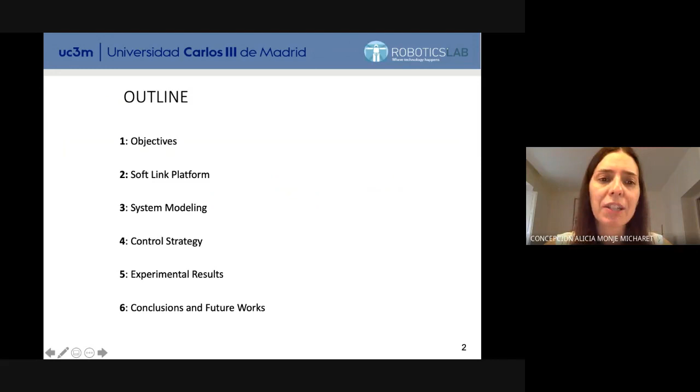I am going to present the work with title Fractional Order Control of Soft Robotic Links. The outline of the presentation is as follows: objectives, the platform itself, the link itself, the modeling of the system, the control strategy, experimental results and conclusions, and future works.

So the objectives of this work are the following ones. First of all, we want to design a soft link to be used as a part of any type of robots, maybe a mobile robot, a floating-based robot, a humanoid robot, any type of robot in which you can integrate this soft link for different purposes. We have used this link as a soft neck for the humanoid robot, but also as a soft arm. So there are different functionalities.

And of course, the design should be prepared to support all types of functionalities. We can even connect different links to each other and have a multi-modular soft robot itself, which is one of the purposes of our future work. So the idea is to design the system, to model the system, and then to control the system using a particular type of controllers, which are called fractional order controllers, because they can guarantee robustness of the system in the terms we will see later.

The system we are proposing, the soft link, is very, very simplified when it comes to modeling. We totally agree with that. There is a strong simplification of the model, but it is later the controller that is responsible for facing the mismatches, the non-linearities that we have neglected, and so on. So a robust strategy from the control point of view will be developed, and we will demonstrate that even if the model is not that accurate and complete, we can manage to control the whole system very robustly.

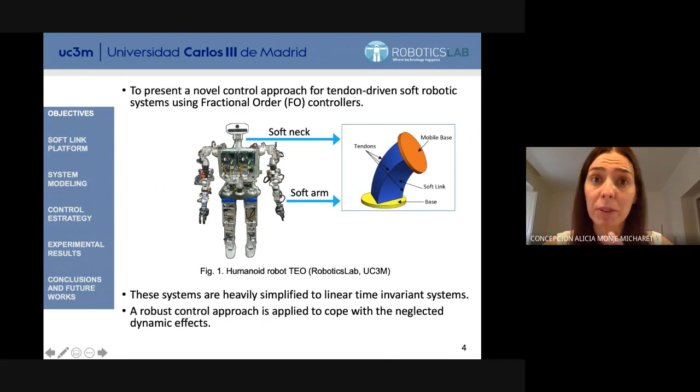So if we concentrate on the platform, it has evolved over time, but this is the base of it. We have, as you can see, a fixed base, and then a mobile platform. These sticks here are to allocate different masses, because we want the system to be robust to different masses on the tip of the system. So this is tendon actuated. We have 3 motors here, each connected to a winch, and then the winch connected to a tendon or a cable.

So by acting on the motors' angular position, we vary the length of the different tendons, and according to that variation, we move the platform. This is quite simple to understand. And of course, this is a 3 degrees of freedom soft continuum link that you can see here, the blue one. It is modeled as an elastic beam undergoing large deformations, and we can interchange the link, replacing it by different types of links, like, for instance, steel spring, or a NinjaFlex neck, which is the final link we are using.

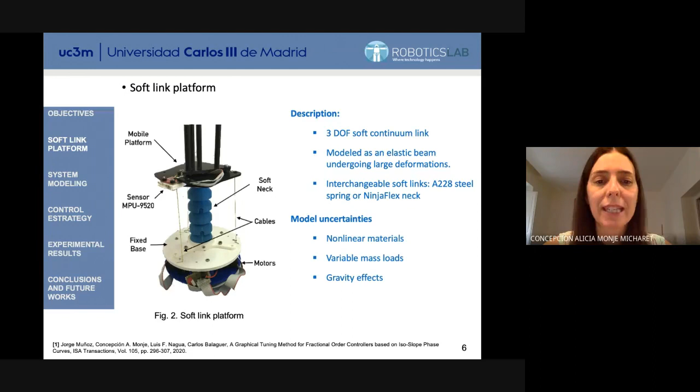The model uncertainties are mainly characterized by the nonlinear material, the variable mass that we can have on the tip, and also the gravity effects, as we will see later. So if we present the main mechanism configuration in figure number 3, we can see that by changing the length of the tendons, I can achieve 2 different angles. The complete pose is composed of 2 main angles, which are the inclination angle and the orientation angle.

So as you can see here, this theta s angle is the orientation that can vary from 0 to 360. So I can orient the soft link in the whole range. And also I have this inclination angle theta p.

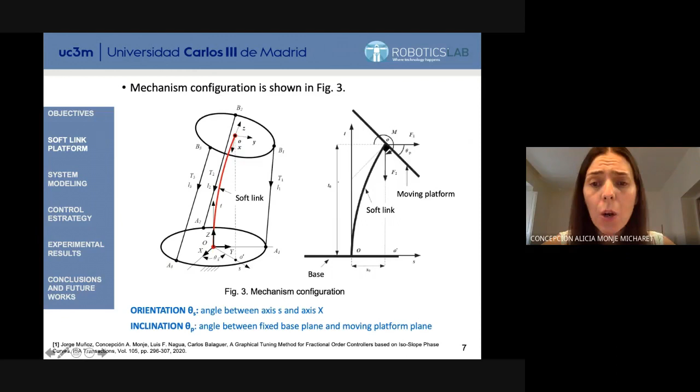Let's continue with the model itself, because what we have to do here is to obtain the inverse kinematics. So why the inverse kinematics? Because if for a particular pose, theta s and theta p, I obtain the length of the cables, then I can later relate that length of the cables with the particular angular position of each motor acting on the tendons. And then I can control each motor to achieve its particular angular position. Then I would be controlling the whole system to achieve that particular pose.

So the inverse kinematics problem is as follows. For a particular set of angles theta p and theta s, which is the pose, I determine the different lengths. And then I relate each length with a particular angular position of the motor.

So finally, the control problem, in a very summarized way, is reduced to just simply controlling the motor position that we have at each motor level, and then controlling that, I will achieve the particular pose. And so the transfer function of each motor in a first approach is, as usual, a second order transfer function if we relate the velocity input and the velocity output, right?

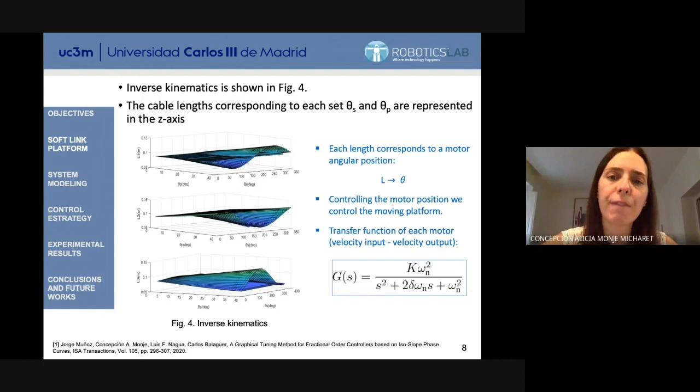So finally, controlling this transfer function, which is modeling each motor, so that I can achieve particular angular positions, which is the same as saying particular lengths of my tendons, I would be able to achieve particular poses. And this is the problem, right?

Okay, so of course, under this assumption, we are assuming a lot of simplifications. First of all, the stiffness properties of the beam are considered isotropic and linear elastic. The tendons are also inelastic. No dynamic effects on the beam are considered. Only the actuator dynamics remains. This is important. In order to linearize the system dynamics, we assume that the beam deforms with a constant curvature. We will see that later physically on the videos.

So finally, what we have is that the system has these two angles, theta s and theta p, which are the ones defining the pose only, right? And then the stiffness in shear and axial deformation directions is infinity. Only the bending stiffness remains.

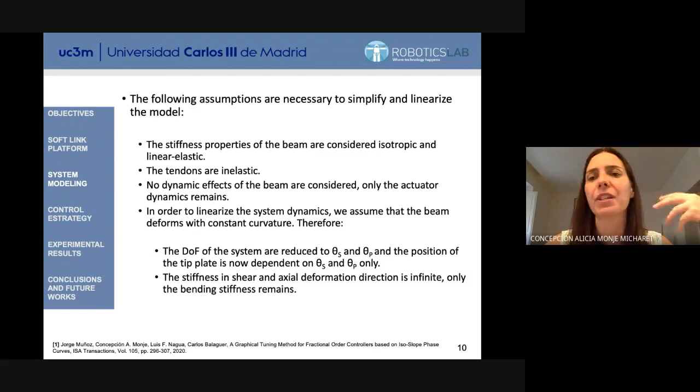These are the assumptions. I agree, these are strong assumptions, but let's see later how the controller behaves to face the reality when really controlling the real platform. That includes, of course, all non-linearities, mismatches, etc. We will see how the controller is able to face this, right? So let's concentrate on the modeling, taking these assumptions into account, and let's face two different perspectives, right?

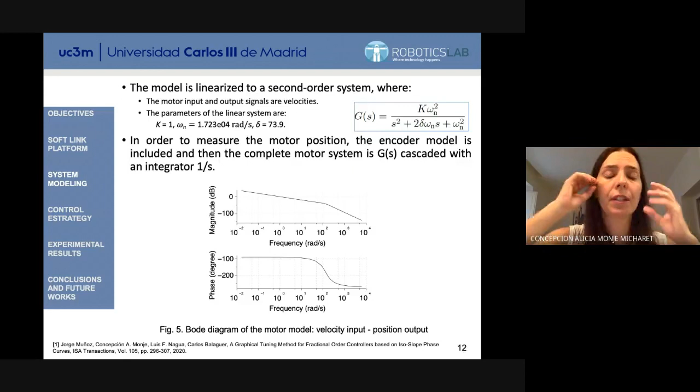The first case is an encoder-based control. So what we do here is based on the following assumptions and the inverse kinematics I presented previously. The thing is that, okay, I have 3 motors that I have to control in angular position, and I know that this is the transfer function characterizing each dynamics of the motor, right? So I can characterize that transfer function, and these are the parameters k, omega n, and delta, typical parameters in a second order system, right?

But since I am interested in measuring the angular position instead of the velocity, then I can integrate there the encoder model so that I can measure the position, which is, as you know, given by a transfer function which is an integrator. So I cascade this transfer function G(s) with an integrator 1 over s. And this is the whole final transfer function, the whole model. Here you have a Bode diagram. And of course, you can see that the complete model is there in frequency. So later, this would be the frequency behavior I will use as a reference to design the controller, right?

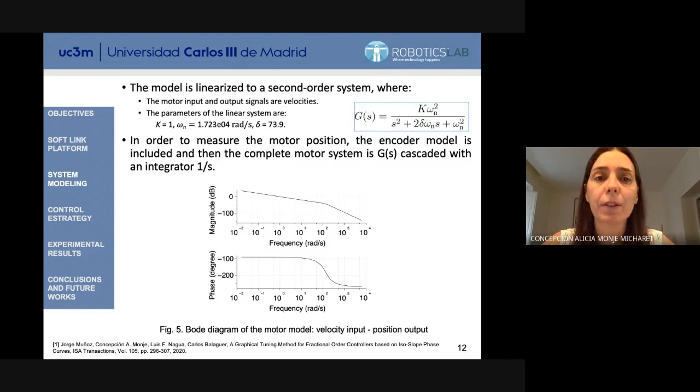So I repeat, with this transfer function, controlling these dynamics, I am neglecting everything coming next, the nonlinearity of the link, everything, right? Then controlling this, I will try and control the pose of the system. We will see, of course, the errors we are committing and that this approach is not the best possible. But let's see how, even if it is not the best, we can control the system quite accurately, right?

Okay, the other option is, okay, this is an encoder-based strategy, but of course we are neglecting the dynamics of the link. Why not include that dynamics in the identification? Of course, this is what we do, and we use for that the inertial measurement unit that the system has on the tip.

So what we do for this identification is very simple. As an input to the system, I use a step, an inclination step signal, right? So that for that inclination commanded, I measure the final inclination of the tip using the IMU sensor. So if I relate this output inclination with the input inclination, I can characterize the system with a simple first order transfer function, as you can see here with K and T, these two ones in the slide.

So I can also represent the Bode diagram and also the temporal response, the step response of the system. So this can be the model to control. And in here we are introducing, in a linearized way, of course, the model of the link itself.

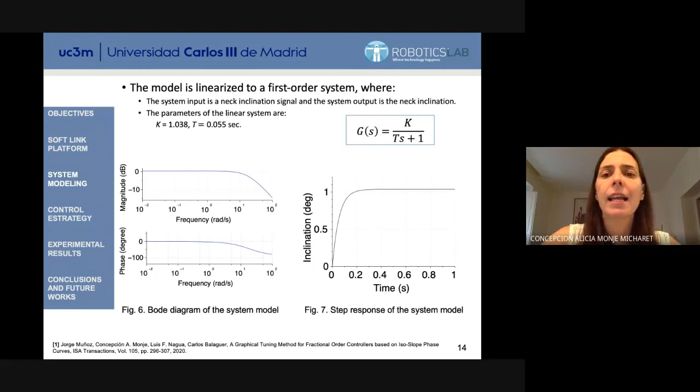Okay, then let's design controllers for each of the cases, and let's see the differences, right? So the controller strategy itself. So what is the problem when using this type of links? Of course, we have model uncertainties, as you can see here. Which type of uncertainties? This is important because not all uncertainties are considered, of course. But there is something logical here.

If I am using this as an elastic link, it should be prepared to support different loads, different masses at the top. So imagine this is a neck. So the head of the robot can vary in mass, right? And the controller, the system itself, should be able to manage that mass variation.

And then I have to see and characterize how the different masses on the top affect the final model. And also, we have to take into account that we are building this with a rapid prototyping strategy. So we are using 3D printers, and very, very rapidly we build the link and we assemble everything, right?

So, of course, there are different elements affecting the final model. For instance, if you have the pulleys and you change a little bit the position of the pulleys that we have, of course, this is affecting the final model. But we want the controller to be robust enough so that if I slightly change the pulleys in the final prototype, we don't have to retune the controller over and over again. This is the thing, right?

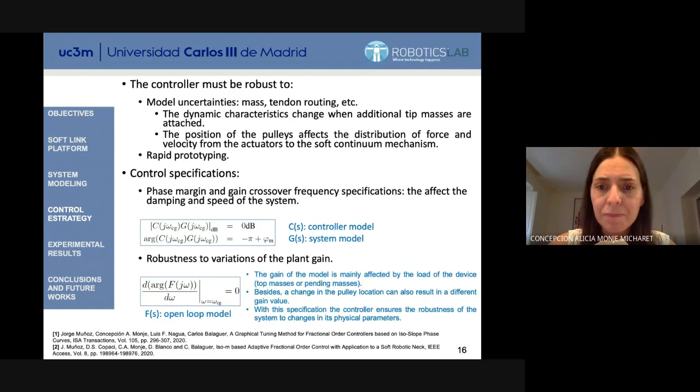So whatever the mass I place on the tip, of course the system can be faster or slower, but the overshoot will keep constant, as we will see in the following slides. So these are the main points to be considered here. We will see now the results.

So what we do here is to tune these three parameters: KP, proportional gain, KD, derivative gain, but also the order of the derivative. I have three parameters to tune and three specifications, three equations. So I can tune the controller using many different tuning methods. One of them is to solve this set of three nonlinear equations with three parameters. You can use optimization for that.

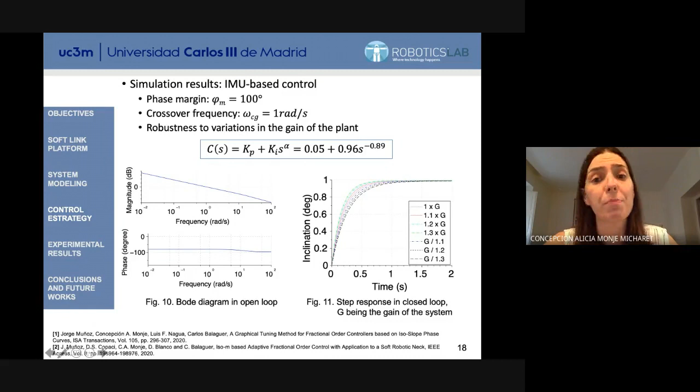And again, if we apply the same, but now tuning the controller for the other transfer function corresponding to the IMU-based system, what we tune is a PI, not a PD, but a PI, okay? This is just to show you that you can tune any type of controller, PI, PD, PID, and this is negative, so it means this is an integrator, that's why this is a PI. And again, you can see here how the phase is flat, and then variations of the gain are just translated into faster or slower responses, but with zero overshoot variation, right?

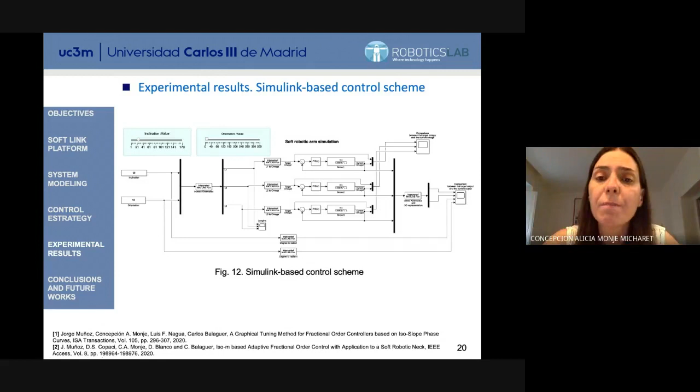So let's see the experimental results. Of course, we have implemented the whole scheme physically, right? So the idea is that I command the inclination and orientation of the platform. I calculate the inverse kinematics. And then from the inverse kinematics, I reach the values of the lengths of the tendons, L1, L2, and L3. And this is translated into a particular angular position target for the 3 motors. And then the motors are controlled with the PID, fractional, integer, whatever, for the sake of comparison. And then I can measure the results.

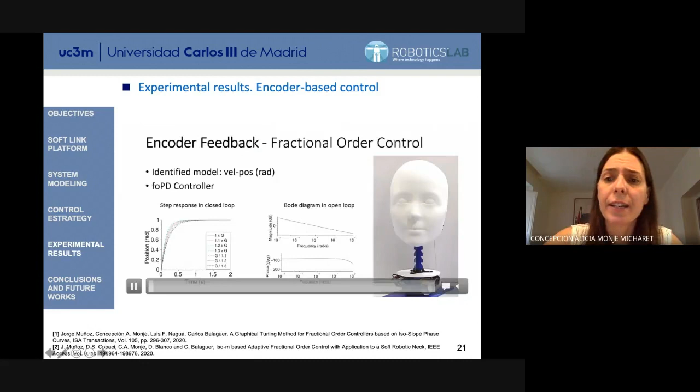So look at the case in which we have the encoder-based control. Here you can see the neck. First of all, the load is zero mass at the tip. So we are commanding different inclinations from 0 to 15 at all possible orientations, right? So we are orienting the neck in the whole round, and for each orientation, we are achieving inclinations of 15 degrees. This is what we do. The mass of the neck is 16 grams, and the base mass is 125 grams. So you can see here that the system is under control, of course, just based on the encoder measurements, we are closing the loop.

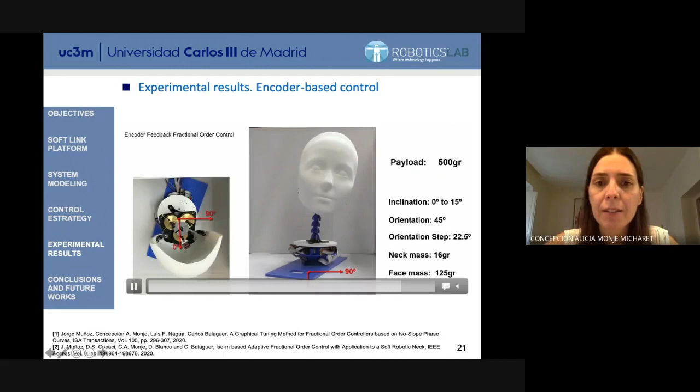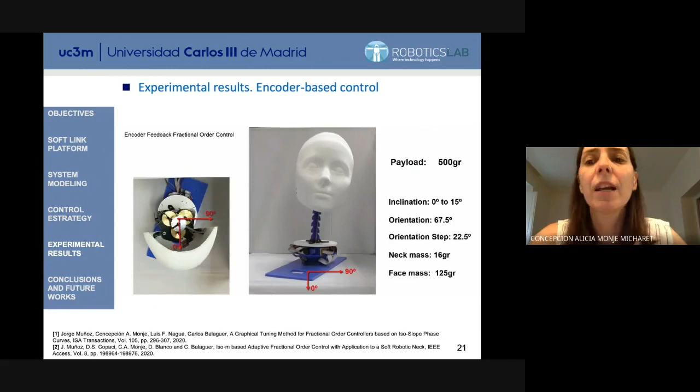Here you can see what happens when we load the system with 100 grams. So it's totally under control, and I would like to go directly to the case of 500 grams. So you can see that the system is robust. There is no problem, even if the mass is very, very high and the neck mass is very small, 16 grams, the system performs correctly. But look at the results. Of course, if we trust just the kinematics that we have calculated before, we can see that the poses are achieved almost without any error, just negligible errors.

But look at the real measurement. The IMU system is telling us that the inclination and the orientations are not exactly the ones commanded. We can see that especially for the worst case, which is the higher mass, 500 grams, right? There is a difference. So apparently the encoders are telling me that I am achieving that pose, but the reality is that the IMU sensor is telling me, no, you are not achieving it. And there are differences if you select one mass or the other. Right? The same applies for the orientation, even if the orientation is better.

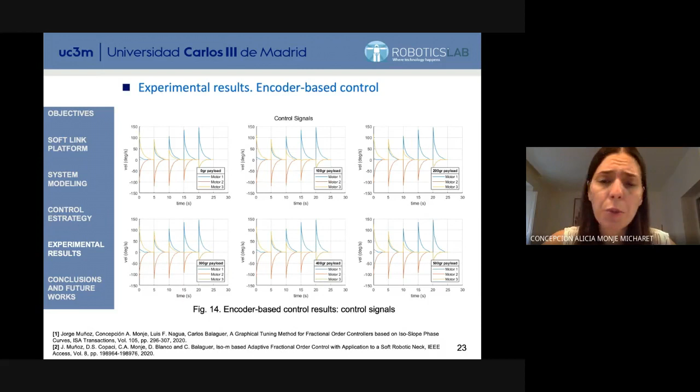By the way, these jumps that you can see here are just simply because around zero, it is difficult to determine if the orientation is zero or 360 degrees, right? In following works, we have solved this problem. Well, for sure, the control signals are totally under control, there is no saturation, and we can control this with simple control signals, right? So let's see now what happens if I use the IMU feedback.

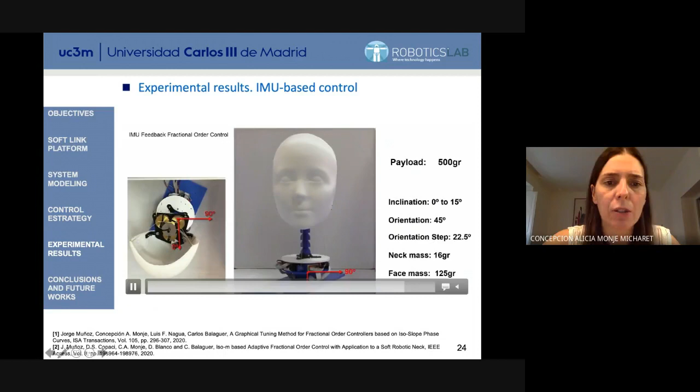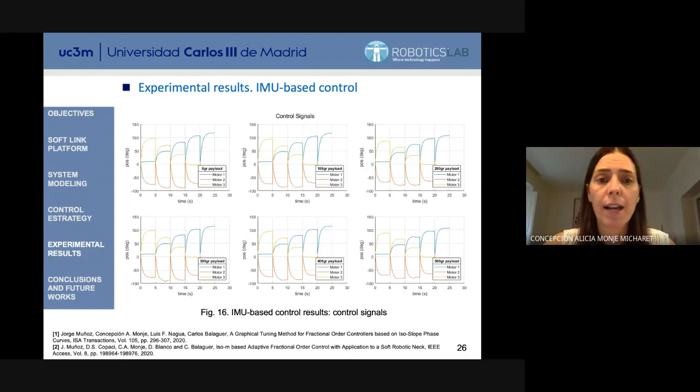I apply the same. Here you can see again the neck. Let's see that for the maximum mass, which is 500 grams, of course the system is robust. Here you can see all the masses placed on the tip. And if we analyze the results now, of course, since we are using that information to close the loop, we are controlling more accurately. And the important thing is that you can see that for whatever the mass, the system keeps robust. This is important, right? And this is the type of robustness we are looking for. Here you can see again the control laws, which are simple, soft, and totally feasible for the system, right?

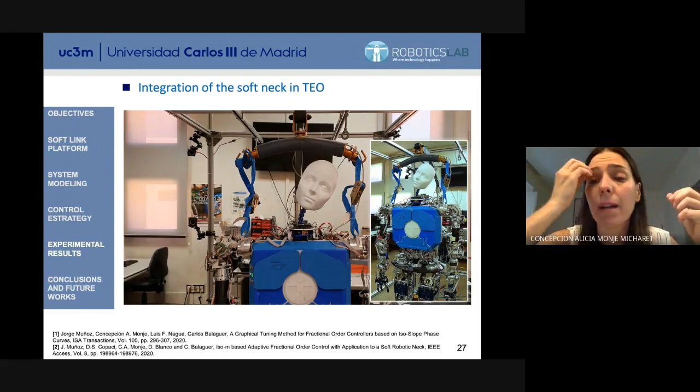So if we integrate the neck on TEO, we can see that we, of course, can have these different and versatile movements for the robot's neck. You can see here that the system is simply following some reference paths, and we can control this with a 3D mouse or just by commanding fixed trajectories. You can see that sometimes the neck moves a little bit, and this is because it is not very well attached to the trunk of the robot, not because it is shaking or showing vibrations, right?

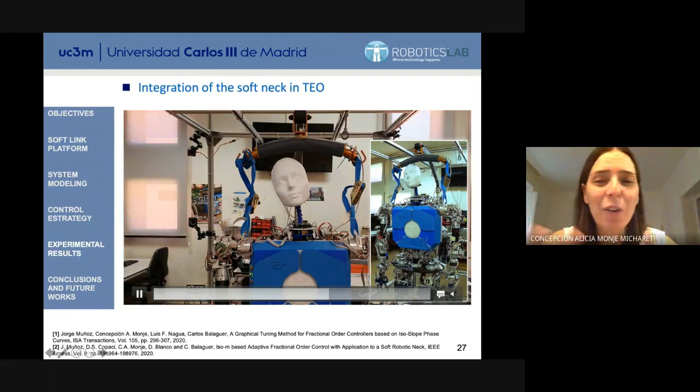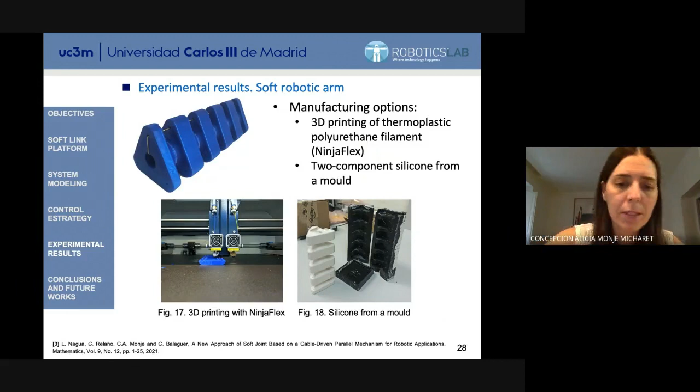So this is one of the things we have achieved, but we have, of course, evolved. Why? Because we try to use that link not as a neck, but as an arm, which is more interesting from our perspective. The thing is that the structure wasn't able to support bending masses. If you want to manipulate a mass in the horizontal position as an arm, grasping loads and placing them here and there, then you would need a more robust structure. And also we wanted to integrate the tendons inside the structure and so on.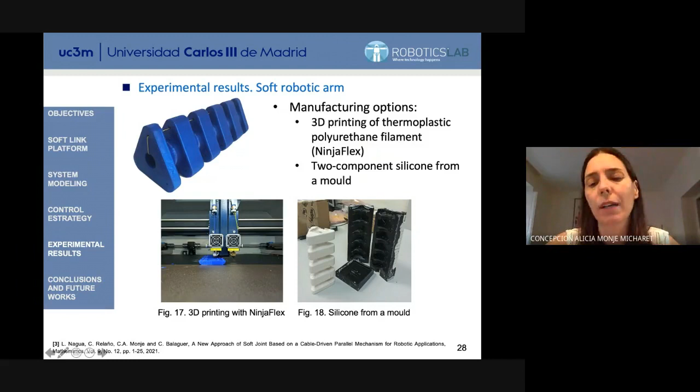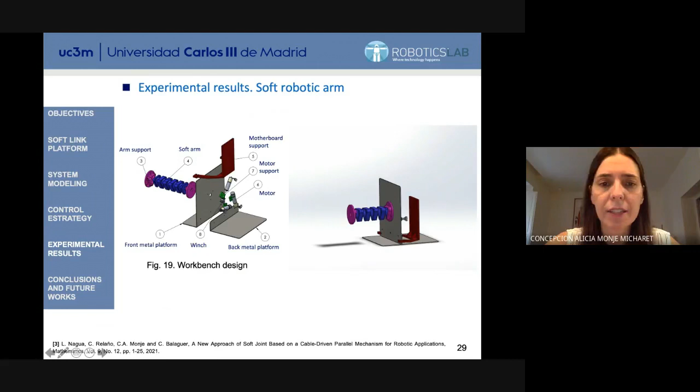So we achieved this design. You can see here that you can print it using 3D printers with NinjaFlex material, or why not a two-component silicone from a mold, right? But this is the final design. If you look at the workbench we have set up, you can see that again you have 3 tendons, 3 motors placed as in this graph, and this is the solution that we have achieved.

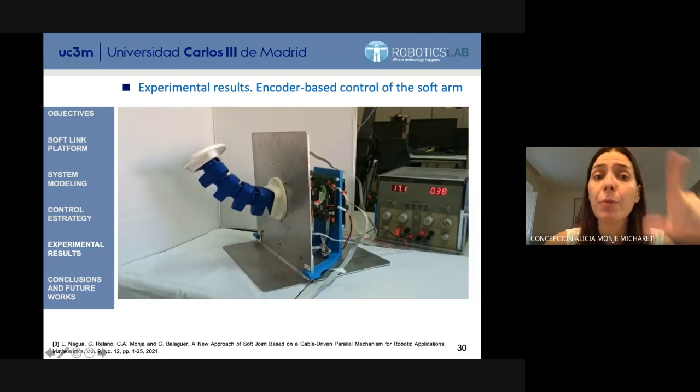So here you can see how the range of movements is higher, more controlled, and since we have integrated the tendons inside the structure, now the constant curvature assumption is better achieved, right? So modeling is more accurate, and also the control is more effective. We are now testing this platform with different loads, and this is working perfectly well. In future works, you will be able to see that. We are finishing these experiments right now.

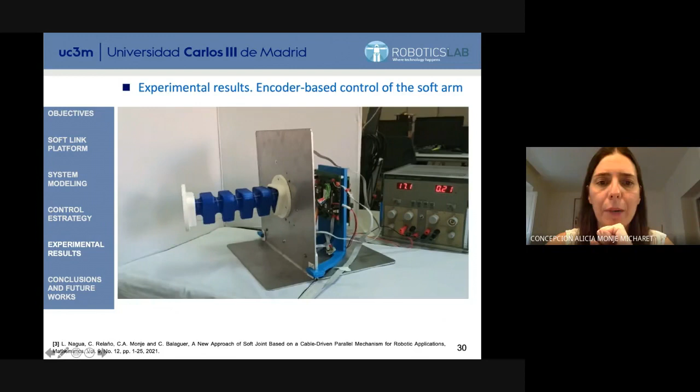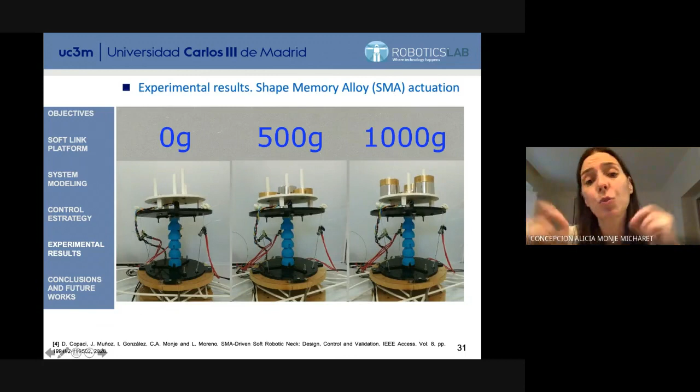So this is one of the main achievements, and I would like to share with you another type of design in which we have replaced the tendons by shape memory alloy actuation. So now the tendons are not inelastic, but they are actuators by themselves, right? What we do with this shape memory alloy material is, when we heat the material, the length changes, and then controlling the different tendons with currents, I can vary the length, and then I can control the system.

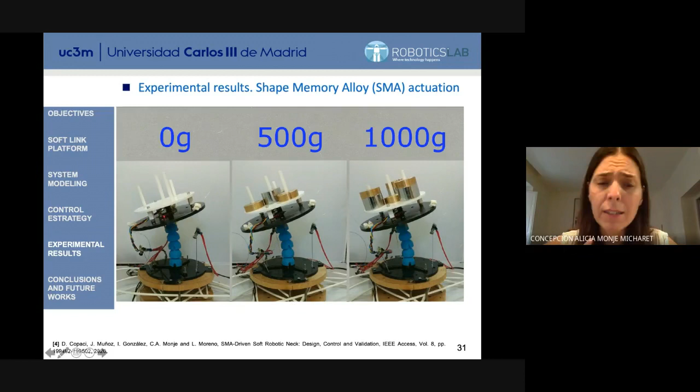So this step implies that we are considering not just a flexible link or a soft link, but also a soft actuation, right? And this is important. Of course, there is a lot of work to be done on this side, but we are confident that we can achieve very good results integrating SMA actuation into the system.

And just to finish, I would like to conclude by summarizing the main objectives we have achieved. We have designed, built, and then modeled and controlled the different soft links that I have presented here to you. And finally, the control strategy we have used is the fractional order control strategy, because it guarantees robustness to mass variation, mainly in these types of systems, but also to other mismatches in the system modeling, right?

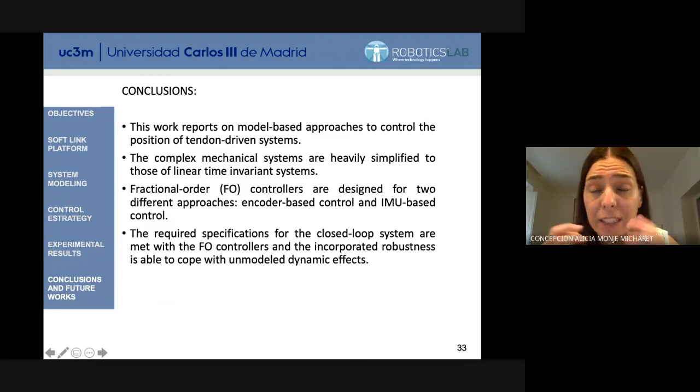I really encourage you to read all the references. They are open access so that you can have more information about the type of controllers I am presenting. And of course, this robustness that I introduced in the system is able to face all the mismatches from the simplifications of the model we are assuming, right?

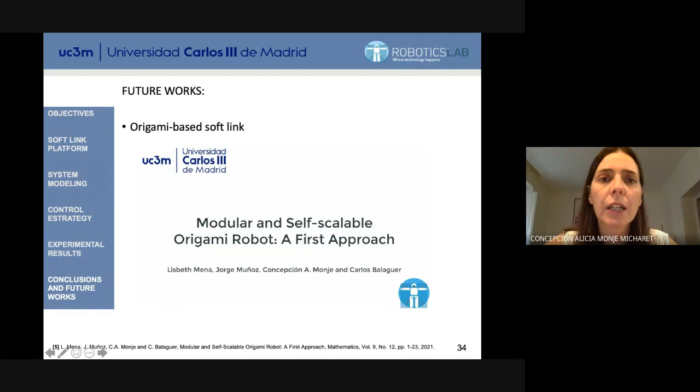In future works, of course, we have to improve a lot the designs we have developed so far, but we are also integrating a new type of link, which is an origami-based soft link, as you can see here. We have designed this based on an origami structure, and with the motor, we can control the orientation and also the length of the origami structure, right?

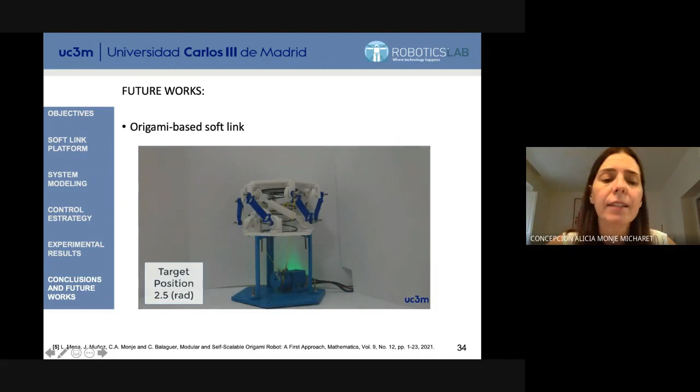So this is our first approach, which we have published in this Mathematics paper, as you can see here, reference number 5. We are quite happy that this paper has been very well considered. It is now on the front of the journal, opening the journal issue. So we are quite happy. And of course, there are still many things to do here, but this is an approach we would like to keep working on in the future.

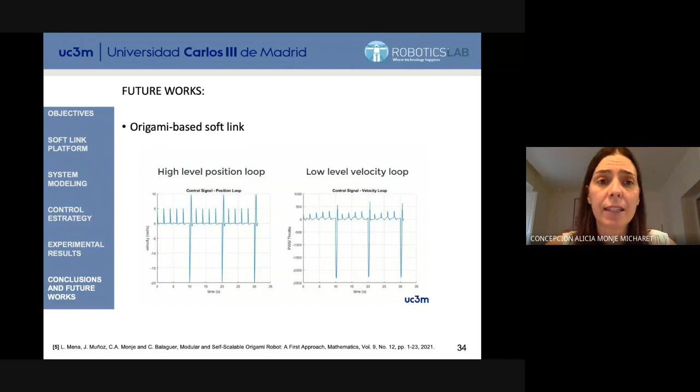So this is my presentation. I hope you have liked the different modeling and control objectives I have presented, and I will be very happy to solve any doubts or questions you may have.